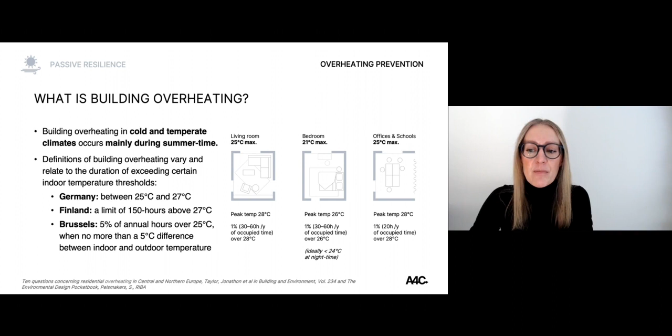On the right, you can see some recommendations for living room, office and schools to be at 25 degrees Celsius maximum as indoor temperature. But some peak temperatures might occur, for example 28 degrees Celsius, as long as they're not more than 1% of the occupied time. Bedrooms and living spaces shouldn't be more than 21 degrees Celsius maximum. A peak temperature of 26 may occur when it's not more than 1% of the occupied time, but ideally for health and well-being implications, temperatures stay below 24 degrees Celsius at night time.

So what causes building overheating? Well, buildings overheat when the heat gains from the outdoors, but also the heat generated indoors, are greater than the heat losses for a prolonged period of time.

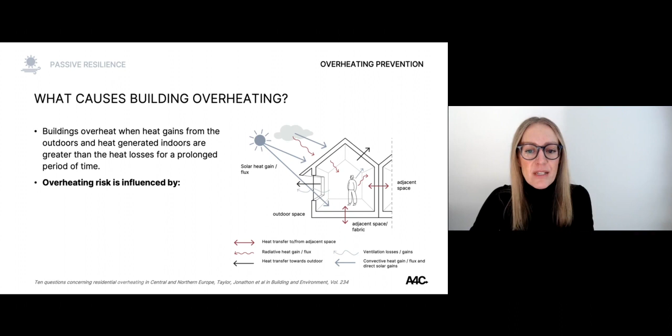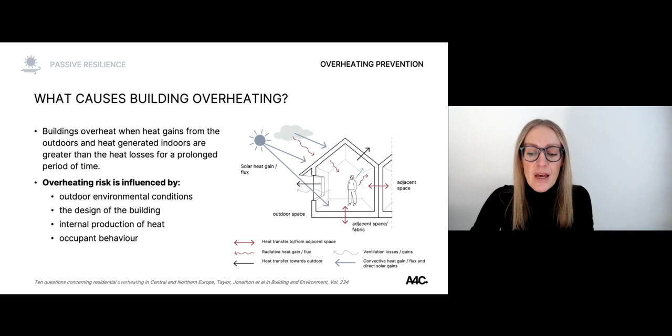The overheating risk is influenced by many different factors. The first is the outdoor environmental conditions, so how hot is it actually outside? Also the design of the building, for example how much sunlight can get inside spaces and how long it remains there. Of course, also the internal production of heat, and then occupant behavior, because many measures that prevent building overheating risk rely on occupant behavior. I'll go through each of these four now, one by one.

Let's start with the outdoor environmental conditions, and specifically those that contribute to increased building overheating risk. High temperatures outside, particularly when they're over 32 degrees Celsius, can really contribute to building overheating risk. Temperatures over 41 degrees Celsius are really dangerous. High levels of relative humidity and very little air movement also contribute to building overheating risk.

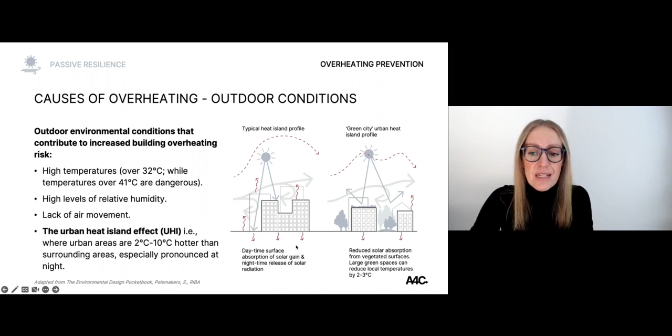Also, the urban heat island effect is an increasing risk to building overheating. It's covered in different talks, but in brief, it's a phenomenon where urban areas can be 2 to even 10 degrees Celsius hotter than the surrounding areas, especially pronounced at nighttime. In the daytime, there's surface absorption of solar gain, and any other heat produced in cities, and at nighttime it is released back into the city.

Certain regions of Europe have very long summer nights, for example Northern Europe and particularly the Nordic region and Scandinavia, and they have very low solar angles as well. Both these long summer nights and low solar angles mean that solar gains can enter into spaces for a very long period of time. It also means that even facades facing north receive low angle solar rays on late summer evenings, and that all contributes to the building overheating risk.

Specifically in Northern Europe, spaces have been designed with cold winters in mind, meaning we design them to get a lot of solar gain coming inside spaces and then retain that heat because that's free heating in winter. The problem is that in summer, these solar rays can get into spaces and also stay there for a longer period of time, contributing to overheating risk.

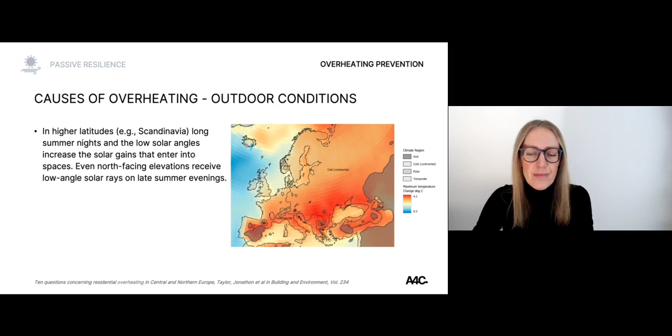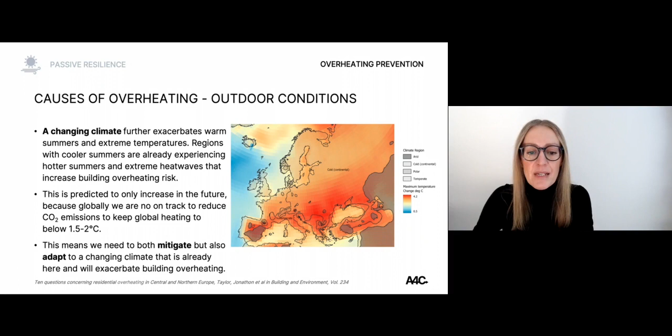And of course, there's also the changing climate, which further exacerbates warm summers and extreme temperatures. We've already seen that regions with currently cooler summers are experiencing much hotter summers and extreme heat waves that increase the building overheating risk. This is predicted to only increase in the future because globally we're not on track to reduce CO2 emissions to keep global heating below 1.5 to 2 degrees Celsius. That means we need to both mitigate and adapt to a changing climate that is already here and will exacerbate building overheating also in the future.

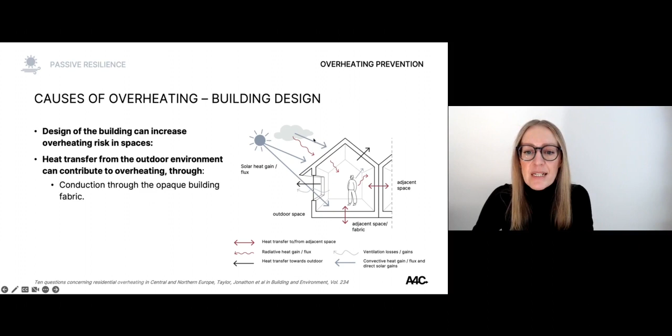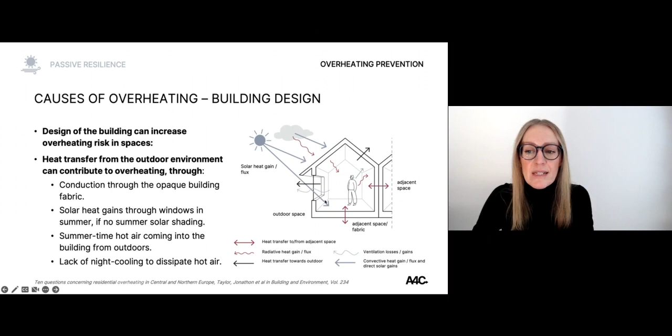The other cause is building design. The design of a building can increase overheating risk because of heat transfer from the outdoor environment, for example through conduction of heat through the opaque building fabric, particularly if it's not very well insulated. There are also solar heat gains through windows in summer if there's no summer solar shading. Hot air can also come inside through ventilation, particularly if temperatures are hotter outside than inside—we should not be using purge ventilation then, as we're only heating up the building further. And if we don't use nighttime cooling to dissipate this hot air, that also contributes to heat build-up in spaces.

Let's go through some key principles. First, a well-insulated building fabric keeps heat inside in winter—that's the whole idea of a well-insulated fabric. But in summer, if there's no solar shading or ventilation strategy to stop summer sun or hot air coming in, or to dissipate it, that same insulation also keeps heat trapped inside.

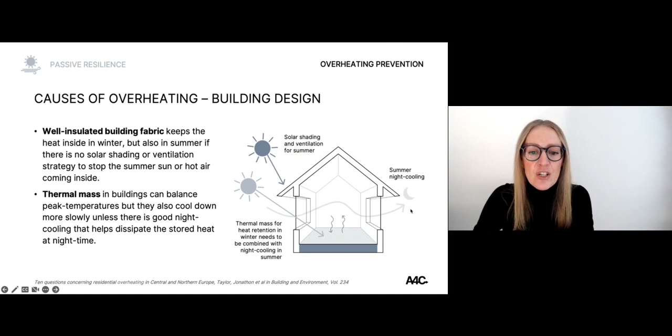Thermal mass in buildings can balance these peak temperatures, but it also cools down more slowly unless there is very good nighttime ventilation that helps dissipate that stored heat from the day at nighttime.

Particularly east and west facades are subject to high solar gains because the angle is much lower, and they're often more difficult to shade from this low-angle solar radiation. This can result in overheating and can also cause uncomfortable glare in non-residential buildings. Of course, building overheating in turn increases the likelihood of active cooling being used.

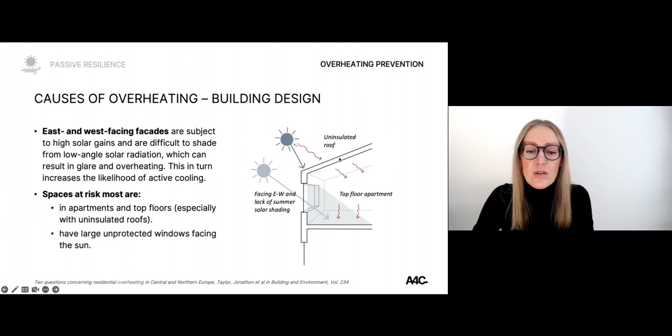The spaces most at risk are those in apartments on the top floor, especially if they're under not very well insulated roofs, and also those that have large unprotected windows facing the sun.

When we undertake building retrofit, for example to increase insulation and reduce heat loss in winter, it can also reduce thermal mass, particularly when we're covering the thermal mass of stone or brick walls on the inside. So when we add internal wall insulation, we can actually reduce thermal mass capacity. That can then contribute to building overheating unless we combine it with other measures at the same time, for example blocking the sun out through solar shading and undertaking nighttime cooling.

When we have small window openings, they can also block the ingress of cool air, especially at night. This is particularly the case in the Nordic region, where windows are designed to be airtight, to only provide some background ventilation, and they're not designed for what we call purge ventilation—which will be covered in another lecture—to create cooling at nighttime. This means there isn't enough cross ventilation to cool down spaces during heat waves.

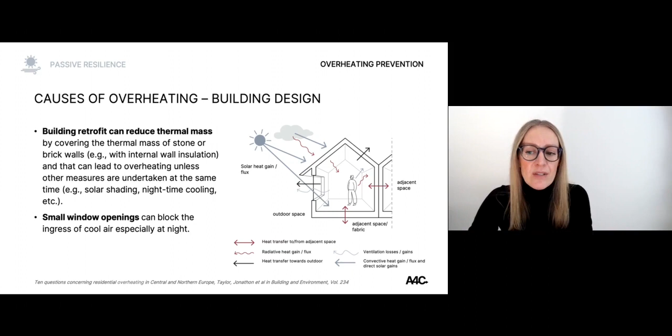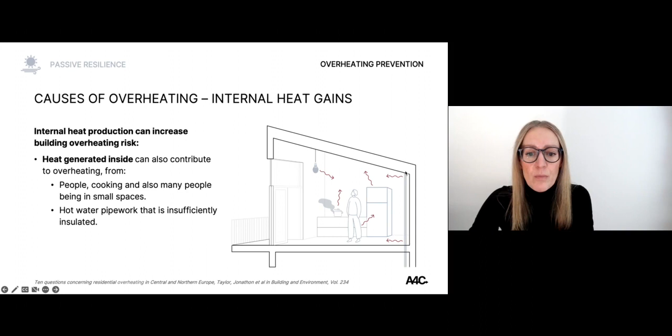As mentioned before, internal heat gains can also increase building overheating risk. It's not just the sun coming inside, but heat generated inside that can contribute to overheating. This heat comes, for example, from people and their activities like cooking, or if there are many people in a small space, they produce a lot of heat which is retained inside. We've also found that hot pipework that is insufficiently insulated can give off heat and contribute to overheating. And when there's a presence of energy inefficient appliances—like lighting, fridges, freezers, and so on—they give off a lot of heat, leading to high internal gains that contribute to building overheating.

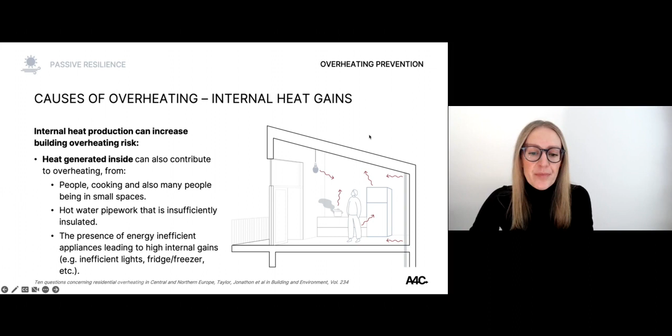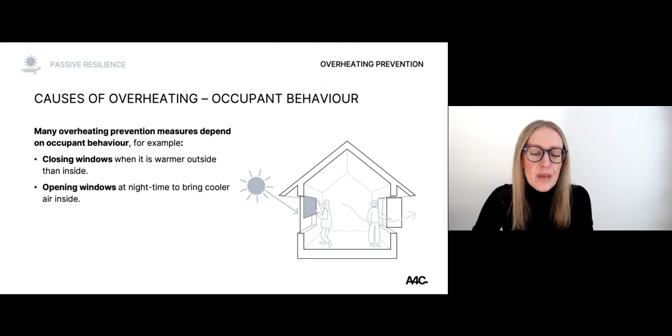That brings us to occupant behavior, because many overheating prevention measures depend on it. For example, we need to close windows when it's warmer outside than inside, otherwise we bring hot air inside which, if the building is well insulated, stays trapped within the envelope. We should then open windows at nighttime when it's cooler, to bring cooler air inside and dissipate the heat stored in the thermal mass back outside.

And we might have to use movable shading, for example blinds, perhaps even active systems like fans, cooling and mechanical ventilation as well, during the daytime.

But people might not actually undertake these actions, and that is often because they don't have the information or knowledge, but also, of course, opening windows has implications for security and safety, and also acoustic issues at night time in inner city areas as well.

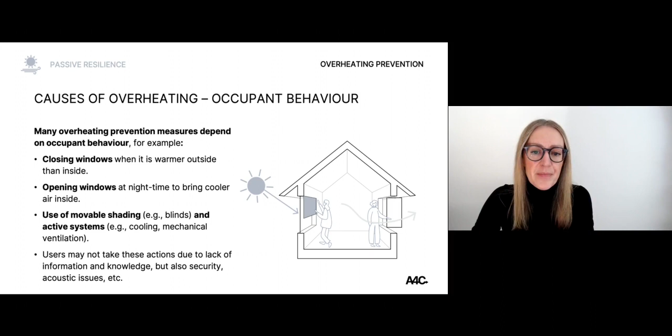So who is most affected? Well, hot temperatures unfortunately also elevate ozone concentrations and other pollutants in the air. That then further exacerbates asthma and other respiratory illnesses, so vulnerable people are affected even more during heat waves.

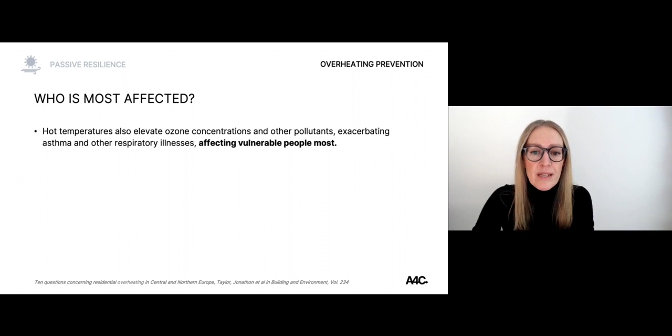Then older people and other people with underlying health conditions might not sense hot temperatures very well, and so they may be unaware how hot it really is, and then it can exacerbate health conditions further, for example, cardiovascular issues.

Also, older people and the very young might not be able to undertake adaptive measures during hot weather. So, for example, it might not be easy for them to adjust clothing or to open and close windows and blinds, maybe even to move to cooler zones inside the space or in the building. And so it means that they're also then more vulnerable to heat as well.

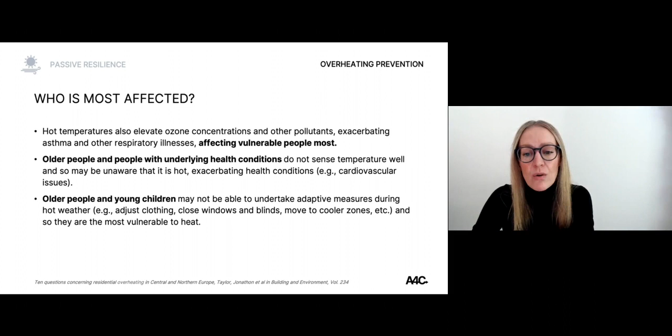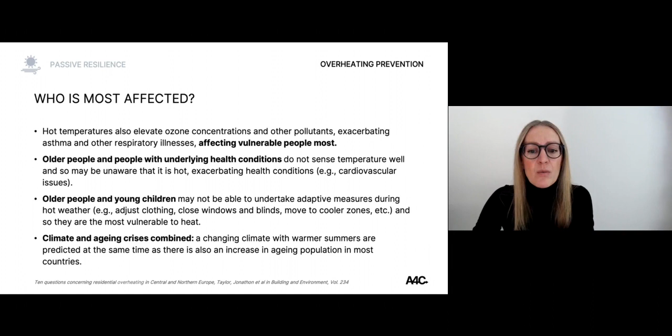And of course, we have a combination of and a clashing of different crises. So the climate and the aging crisis are combining. So we have a changing climate with hotter summers that are predicted at the same time that there's also an increase of an aging population in most countries around the world, and especially in Europe as well. So it means that it will be even more vulnerable as actually the temperatures will become more extreme.

So what are some of the consequences of overheating? Let's look at health implications. So building overheating can cause thermal discomfort, for example, also prevents us from sleeping, which then affects health and productivity.

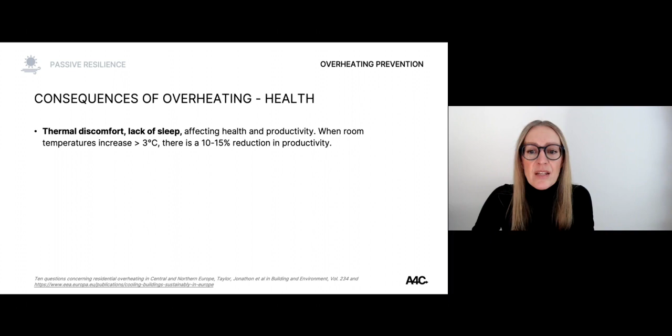For example, when room temperatures increase by more than 3 degrees Celsius, there is actually a 10 to 15% reduction in productivity the next day.

Building overheating can also cause thermal stresses, and that means when the body's core temperature rises too much, the heart rate increases, and that can even lead to mortality. What we do need to keep in mind is that at present in Europe, cold-related mortality is still a bigger problem than heat-related mortality. Of course, that may change towards the later part of this century.

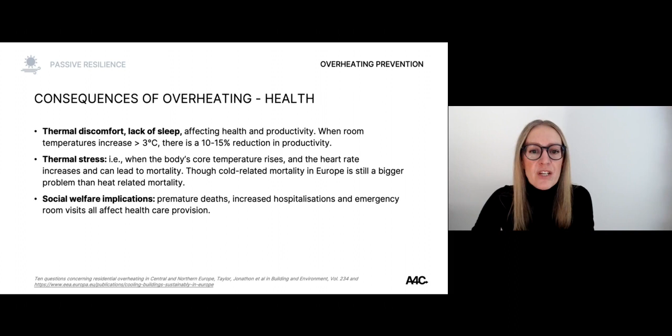Of course, all of this also has social welfare implications. When there are premature deaths, increased hospitalizations, and increased emergency room visits, all of that affects healthcare provision and the pressure on healthcare and society.

What is interesting, though, is that in hotter climates, the heat-related mortality and the issues occurring related to health occur at higher outdoor temperatures than in cold and temperate Europe. And that can be explained because people in hotter climates have been able to already adapt physiologically and behaviorally. And of course, they also tend to live and occupy more appropriate building designs and infrastructures that are specifically designed for hotter climates.

And that's why it's so important that we learn from those hotter climates and include some of those key adaptive measures across all of Europe as well, keeping in mind the current heat waves already, and of course the future predictions of our hotter climate as well and extreme temperatures.

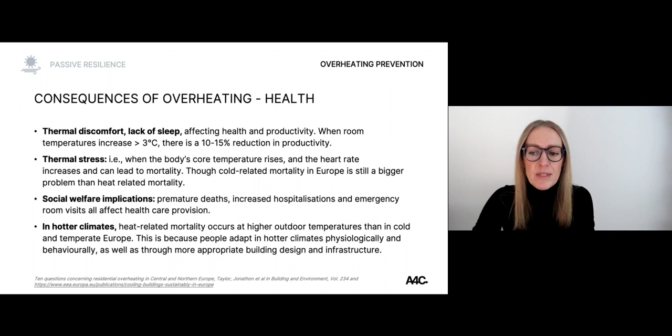Let's look at some of the energy implications of building overheating. Now, building overheating can lead to an increased use of energy and then, of course, also associated carbon emissions.

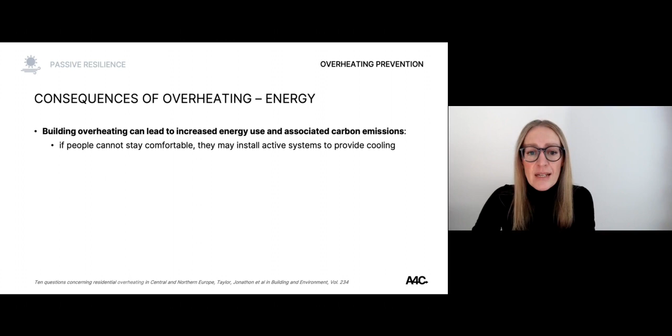And that's because, of course, if people cannot stay comfortable, they may then install active systems to provide active cooling. That then increases the energy use and the carbon emissions, directly contributing, of course, to the climate emergency.

But also it further exacerbates and contributes to an increased urban heat island effect because it pushes warm exhaust air from inside to outside, increasing the urban heat island effect even further.

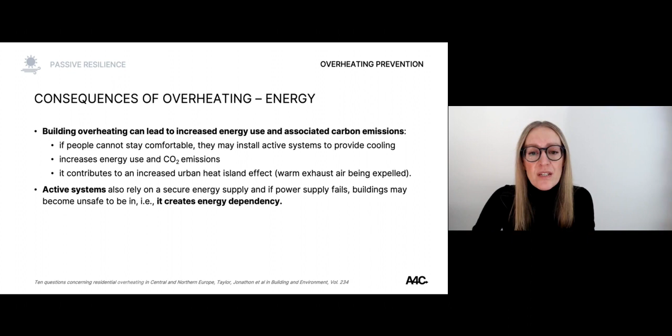Of course, another implication is also when we rely on active systems, we also rely on a secure energy supply. If that power supply fails, buildings may actually become unsafe to occupy. So using active systems also creates energy dependency, and that is why it is so important that we consider passive measures first to mitigate building overheating risk.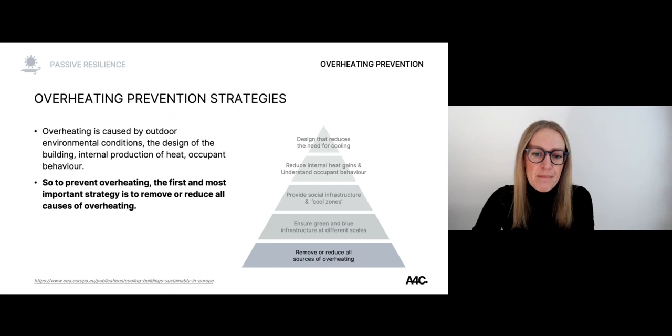And only after we've done that, after we've taken all the causes of overheating away, must we prioritize overheating prevention strategies that reduce the energy need for cooling. We need to do that through passive cooling strategies first, before we even consider anything else.

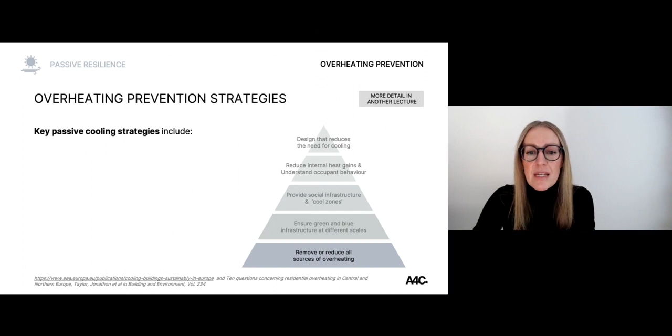Some of these key passive cooling strategies include green and blue infrastructure at the macro, meso and micro scale, which also benefits biodiversity and carbon reduction. This is discussed in more detail in another lecture.

We also need to include social infrastructure at different scales. What that means is that neighbours will look after each other during heat waves, and care for each other. It also means the provision of safe, cool zones in buildings or neighbourhoods, which is covered in another lecture in more detail.

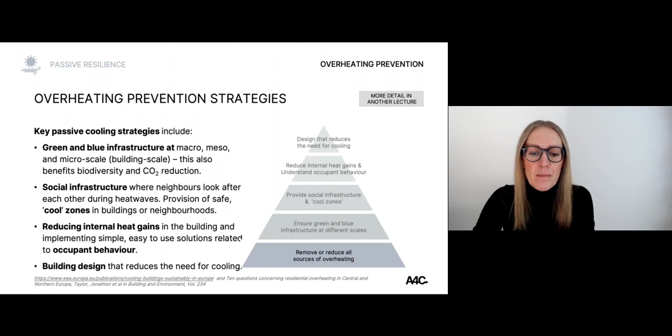And then we need to reduce the internal heat gains in the building, implementing simple, easy-to-use solutions related to occupant behavior. We then need to make sure the building is designed to reduce the need for active cooling. All of this is covered in different lectures.

Some key snapshot ideas of what we can already do at the building scale to reduce the need for active cooling measures: for example, things you should include in your project are light colored and reflective surfaces to reduce the urban heat island effect.

Careful building form and orientation, so you only capture the sun where it is needed. Careful location and design of windows as well. Providing an efficient fabric so that in wintertime it can keep the heat in, but in summertime the heat can be dissipated out.

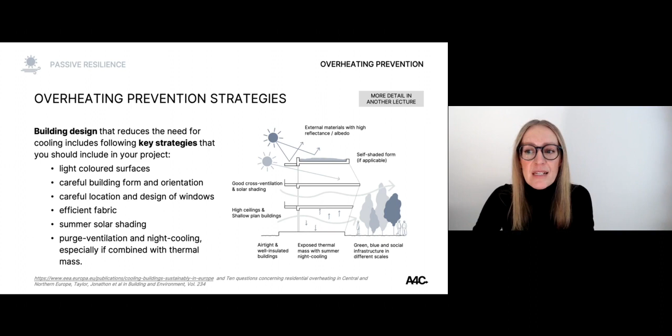And of course, we should prevent the sun coming in in the first place and provide summer solar shading without blocking it in wintertime. Then through purge ventilation and night cooling, especially combined with thermal mass, we can passively cool the building at night time. But all of this is discussed in more detail in another lecture.

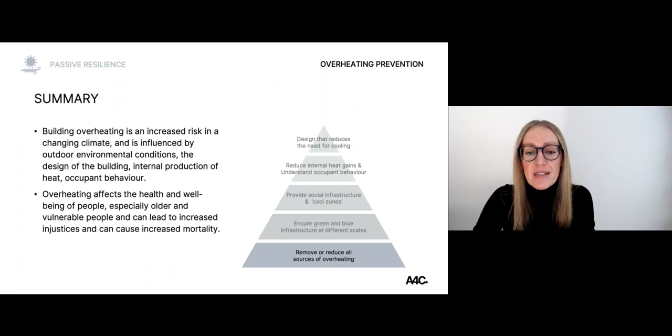So in summary, building overheating is an increased risk in a changing climate. It is influenced by outdoor environmental conditions, the design of the building, the internal production of heat, and occupant behaviour. Overheating affects the health and well-being of people, especially older and vulnerable people, and it can lead to increased injustices and even cause increased mortality.

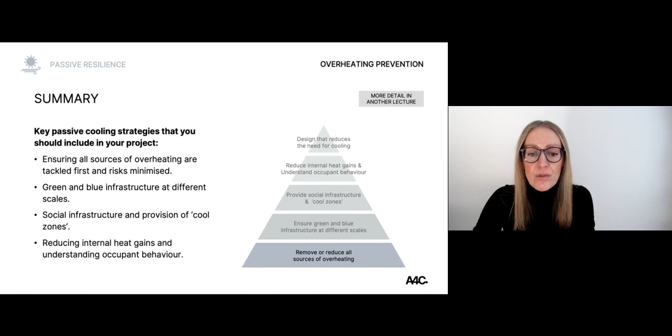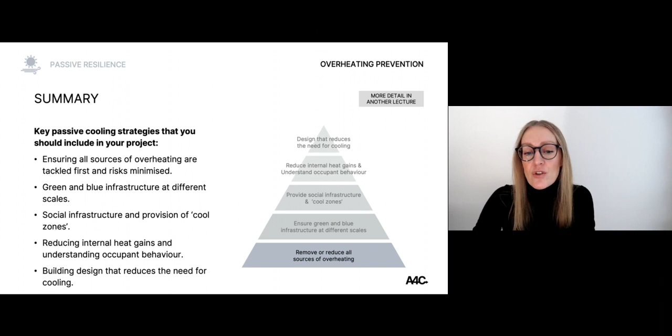Key passive cooling strategies you should always include in your project are: first, ensuring all causes and sources of overheating are tackled first and those risks minimized. Then include green and blue infrastructure at different scales, as well as social infrastructure and provision of cool zones. Make sure all internal heat gains are reduced and that you understand occupant behavior and design with that in mind. Then design your building to reduce the need for any kind of cooling.